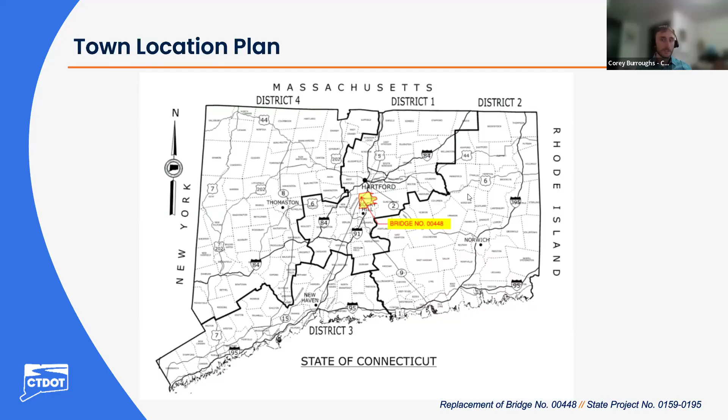And I will now hand the presentation over to Kathleen Erickson to discuss the rights-of-way process.

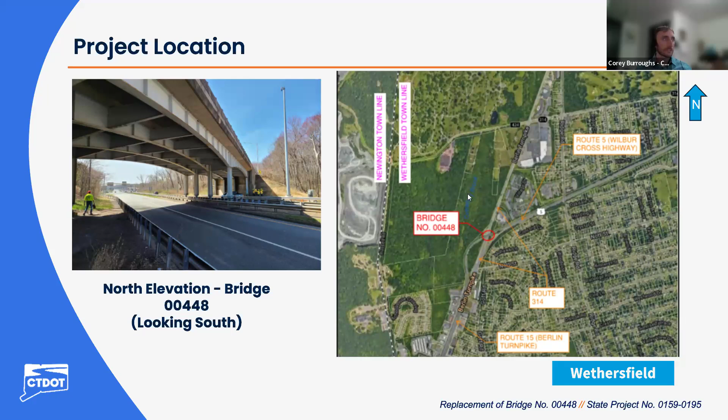Thank you, Corey. My name is Kathleen Erickson, and I'm a project coordinator with the department's Division of Rights-of-Way. Our office is responsible for acquiring property rights needed for transportation projects throughout the state. As you'll see in this presentation, this project will require acquisition of property rights, so I'll give you a brief overview of our acquisition process. Before I get further into that, I want to mention that the specific property impacts for this project are still being finalized and may change as the design progresses. Also, any required property rights will be acquired in accordance with Connecticut General Statutes, Sections 13A-73 and 13A-98E, as well as the Uniform Act.

Next, our office will determine the fair market value of those property rights, which will be used to establish an offer of just compensation. That offer will be sent out to the property owner in writing, and a right-of-way agent will be available to meet with the property owner to explain the project, go over the specific impacts to their property, and explain the state's offer. The property owner will have a reasonable amount of time, typically about 30 days, to consider the state's offer and enter into negotiations.

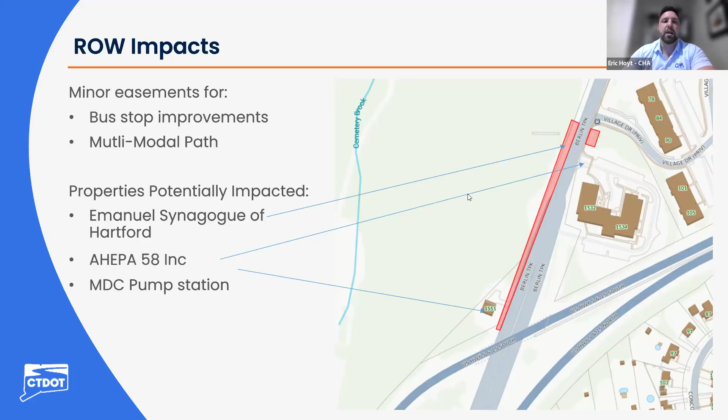Right here, we see our potential right-of-way impacts. It affects 3 properties potentially, which would be the Emmanuel Synagogue of Hartford, AHEPA 58 Inc., and the MDC pump station. What we have outlined here is, on the left-hand side, a multimodal path, and on the right-hand side, the potential limits for a bus stop improvement.

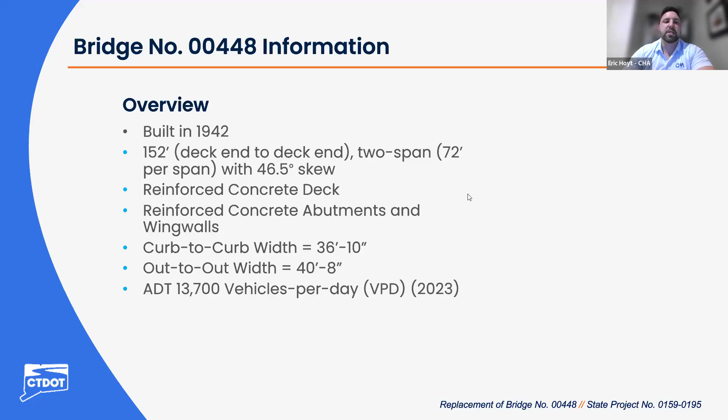So a history of Bridge 448, our bridge in question today. It was built in 1942. It's a 152-foot span, with a reinforced concrete deck, reinforced concrete abutment and wing wall. The average daily traffic is 13,700 vehicles per day.

Here I will highlight the purpose and need of the project. The purpose of the project is to address deficiencies identified in the Connecticut DOT Bridge Inspection Report affecting bridge number 448, to improve the condition and extend the service life of the bridge, and provide safe travel conditions for all facility users. The needs include the following: improve the load rating factor to 1.0 or greater for all legal vehicles, improve the NBI condition rating to a 5 or better, maintain travel on Route 5/15 and Route 314 during and after construction, repair the steel frame, repair the existing substructure concrete, clean, repair, and coat all shoe bearings, and replace all deck joints.

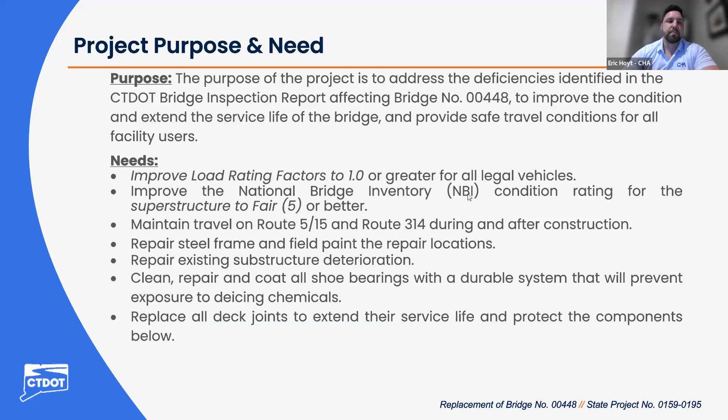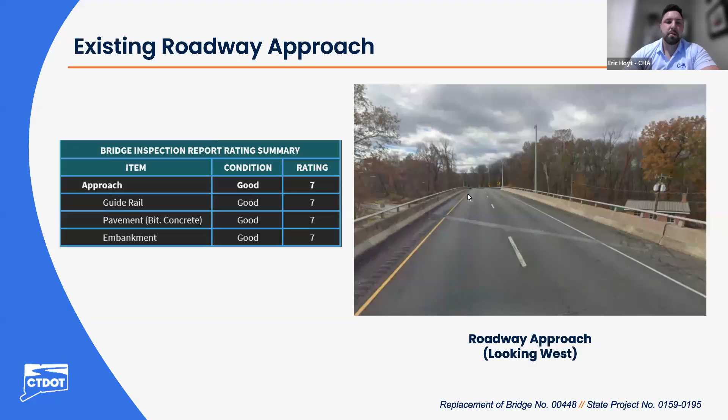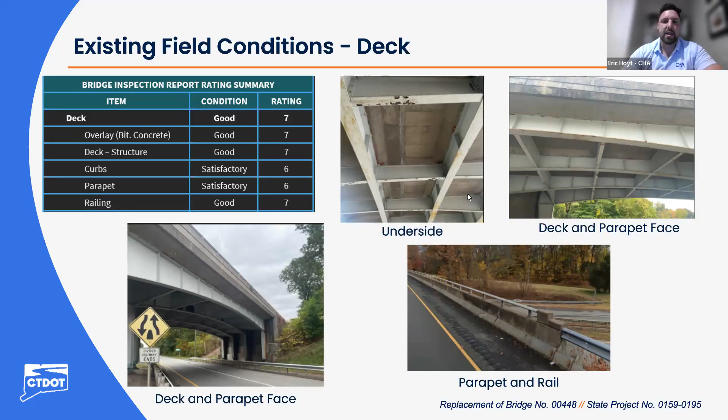Here we show some pictures of the underside of the deck. Again, we see a good to satisfactory condition, and this is just the concrete of the deck itself, not the steel. We'll get to that part of the project later on, but this has been determined also to be in good condition, so our deck is in fair shape.

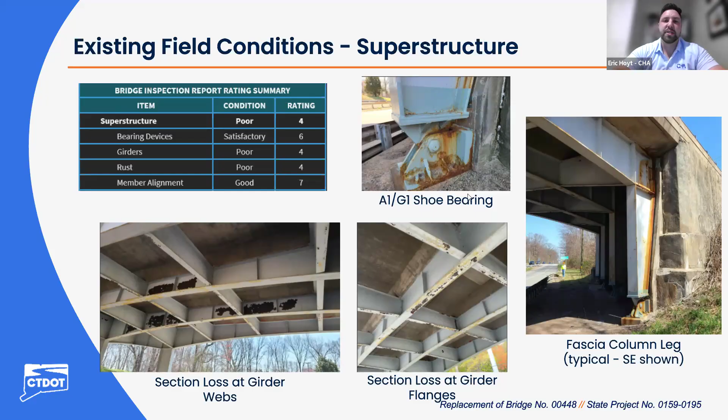Now we get over to the superstructure and we start to see where the project needs attention. We have a rating of 4, poor, for the superstructure, and these pictures highlight some of the damage we see. In particular, one of the shoe bearings is in very rough shape, the fascia column legs on the exterior display a lot of rust, and some of the steel under the bridge has areas of deteriorated paint and section loss. So we will be addressing all of those deficiencies for this project.

Now we see some pictures of the concrete substructure. This as well has some pretty bad spalling of the concrete. So our method for this will be to reface the concrete and fix the aesthetic nature of the wing walls and abutments. Where we're marked here is fair at worst, so with our refacing, we believe we can get this up to satisfactory.

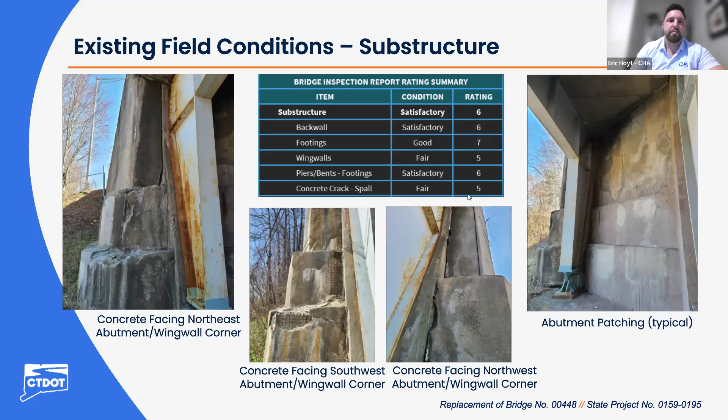Now I'll highlight the proposed bridge project overall. We are going to achieve a load rating factor of 1.2 or greater for all rating vehicles, including emergency vehicles. We will reface the concrete substructure, repair the steel where deficient, and restore the paint on all the steel with a metallized coating. On top of the deck, we will do an SPMO treatment - that's strip, patch, membrane, and overlay - where we strip the asphalt down to the deck, patch any deficiencies, apply a membrane, and then overlay with new asphalt.

After that, we will replace the deck joints, and as a goal of the project, we will minimize travel interruptions on Route 5/15 and Route 314. I will talk more about the travel impacts in a later slide. Also, we will improve existing pedestrian, bicycle, and bus facilities and access on Route 314.

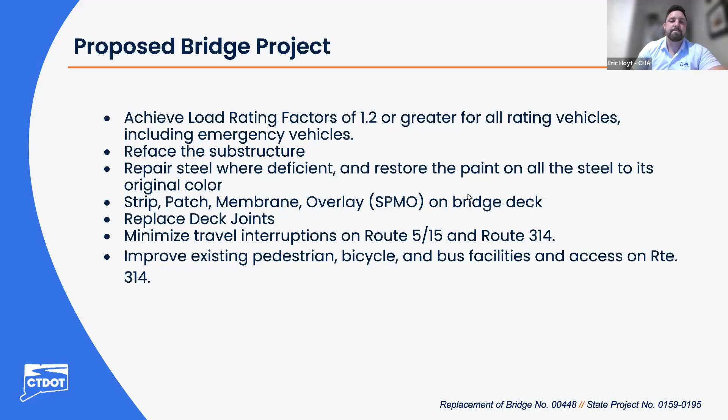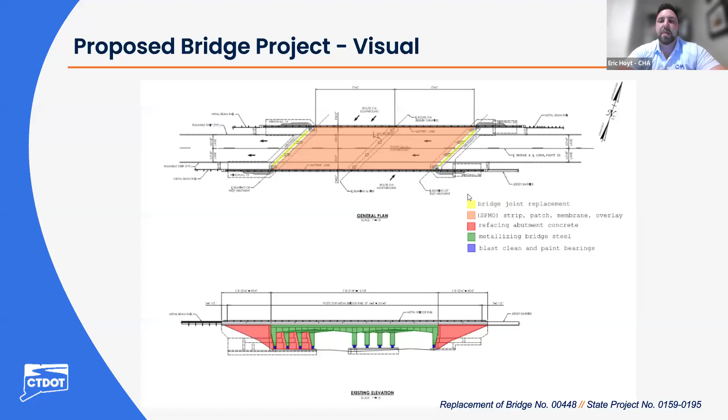So this is a visual showing our proposed bridge project. On the top here, we see the limits of the bridge joint replacement in yellow, and in orange, the limits of our SPMO strip patch membrane overlay treatment - this is on the top side of the bridge deck. On the bottom, we see in red, green, and blue the limits of the other part of our project, which would be refacing the abutment concrete, metallizing the bridge steel, and blast cleaning and painting the bearings.

Now here's where we talk about the maintenance and protection of traffic. The main item here is that there will be no detour for this project. We will be able to achieve all of this work with traffic open in all directions and only closing one lane at a time. Route 314 traffic queues will not be affected by the limits shown on the screen for when we have to do our work on our abutments or our steel.

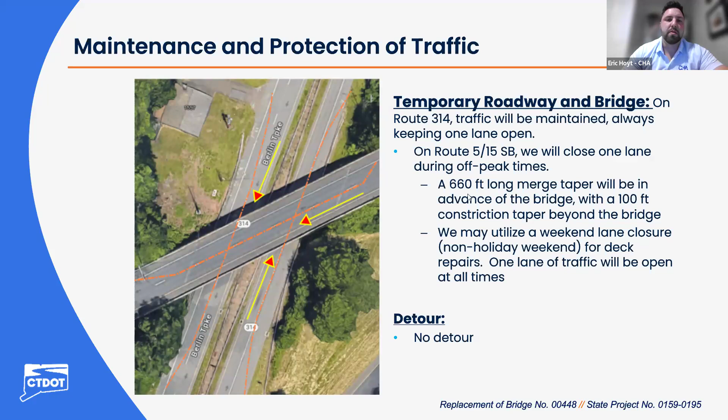On the top side, which is Route 5/15 southbound, we will be taking a lane over the bridge just during off-peak hours, and we will not see any traffic queuing during that time, so it'll be night work. Then on 5/15 southbound, the traffic will have 2 lanes open for peak flows, which would be rush hour and daytime traffic.

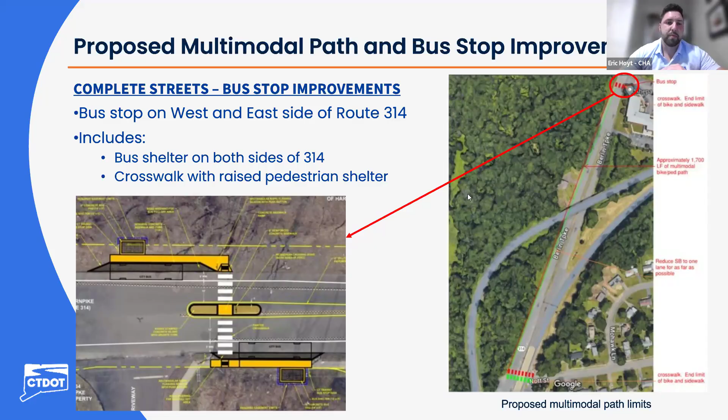On the right side of this slide, we see the limits of the proposed multimodal path. This will start at the bottom at Nott Street and will ascend up 314 on the west side of the road, 1,700 feet. We are proposing a 10-foot wide facility for this multimodal path. Here we can see an image showing a view of how the path might look beside the roadway - we'll have our roadway of Route 314 and a grass buffer in between our 10-foot multimodal path.

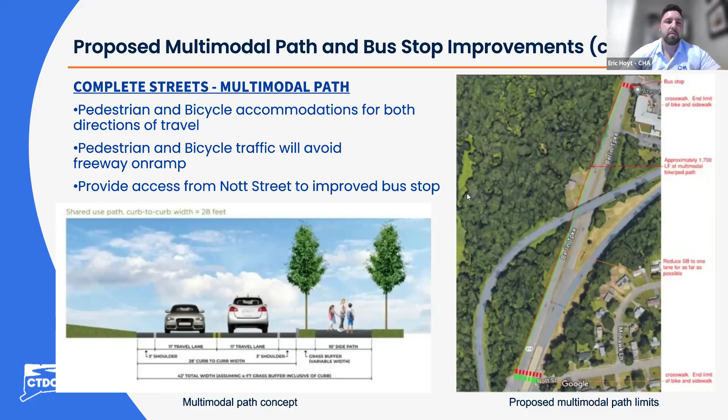So for project schedule and construction costs, we will begin construction in fall 2026 and end construction fall 2027. The construction cost is $6,400,000, 80% of which is federal and 20% state. Work will be done at zero cost to the town of Wethersfield. Project schedule and costs are preliminary and subject to change.